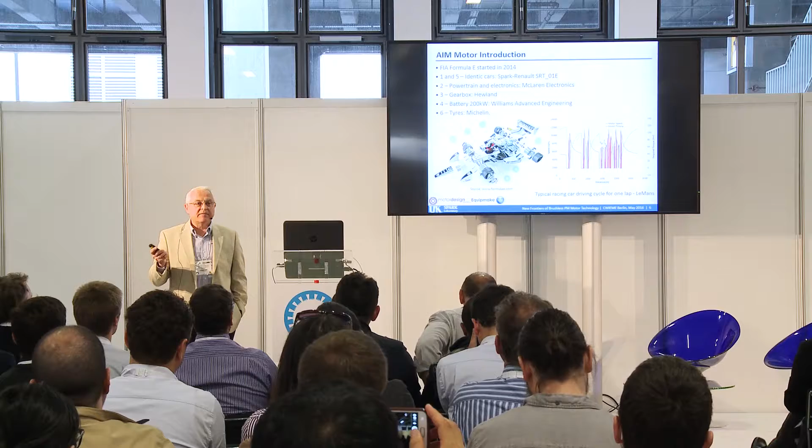Here we have a representation of torque and speed versus time. To set things in perspective and understand how we position ourselves, the motor in question is the AIM motor, listed last in the table. This is by no means a competition per se, but we just want to put things in perspective.

If you look at the types of machines employed by other electric or hybrid vehicles, they are different, and their torque per weight ratio is also largely different. We'll explain what may be the case. If we compare the AIM motor with the YASA, looking at the TRW values, we shouldn't forget that the ratings are largely different — the YASA machine has three times the torque of the AIM motor. As we know from theory and practice, electrical machines typically get naturally better as size increases. So for a small machine, only 110 Newton meters and just 9 kilograms, this is indeed record-setting.

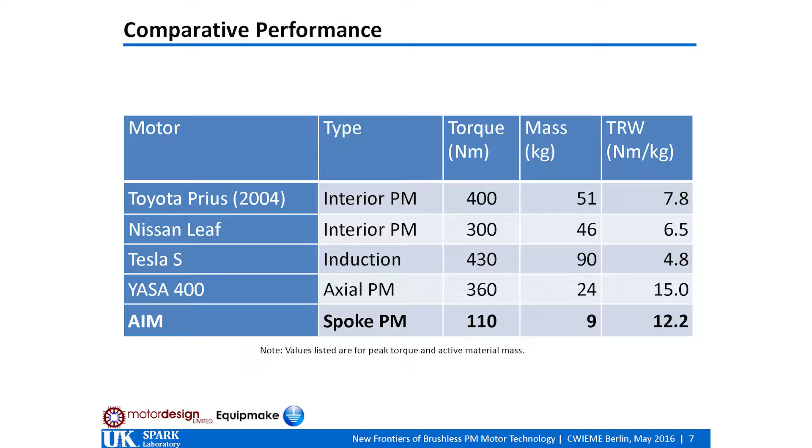I'd like to discuss how some of the teachings from Formula E, a specialty application, can be applied to more common industrial applications, since that will make an impact on the wider community. If we look at a typical pump, constant torque application, or fan curve, one would have to investigate what happens in terms of torque versus speed and efficiency, comparing various operating points within the operating range.

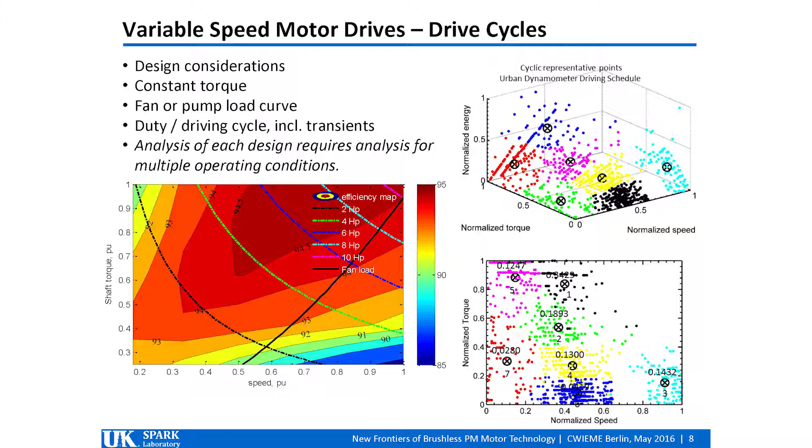If we design electrical machines for electric traction, say for an electric vehicle, the driving cycle itself is known, but nevertheless the variations from one car to another, depending on the traffic, can be largely different. So that is in a way a different challenge.

But the way to approach the problem is to do optimization. And if we look here at three parameters, normalized energy versus normalized torque and normalized speed, we select typically a number of points that would be the most important to define an objective in terms of weighted importance. Here we have figured the most important for a typical driving cycle.

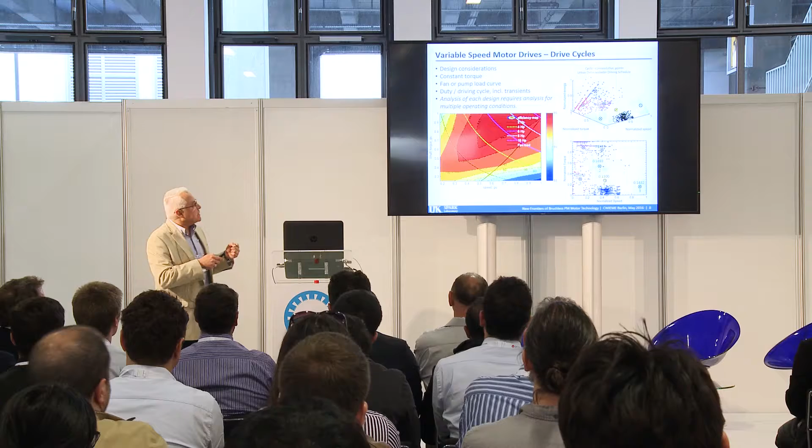Now, with modern technology, we can no longer talk about one unique optimal solution. If we optimize for multiple criteria, and the example we'll have here optimizes to reduce material cost, and at the same time to reduce the losses, the most important being the stator losses, then we end up with a family of curves.

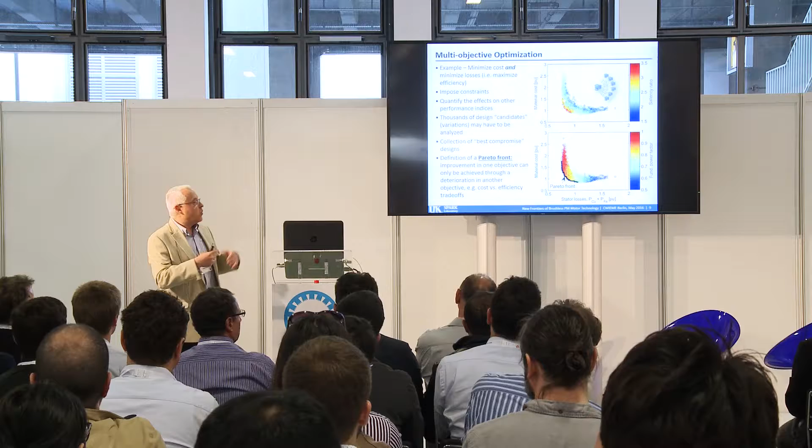What we represented with the small circles are all the candidate designs that have been investigated through systematic design procedures, and they number into the thousands. The automated design, which is inspired from computational artificial intelligence, is based on differential evolution, and will progress until it reaches what we see here demarcated as the Pareto front.

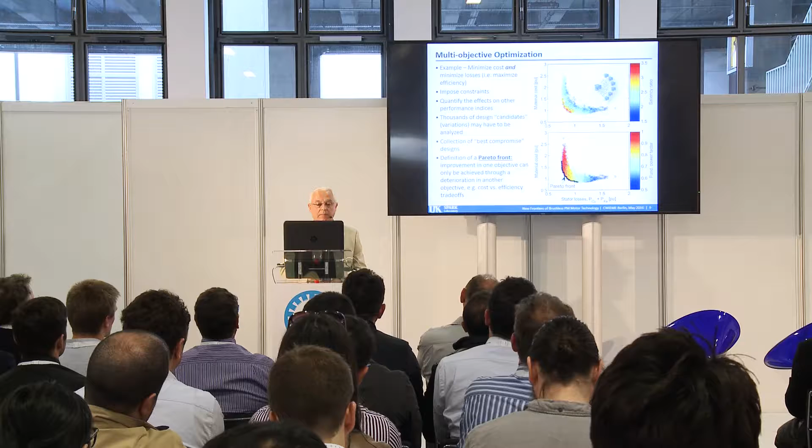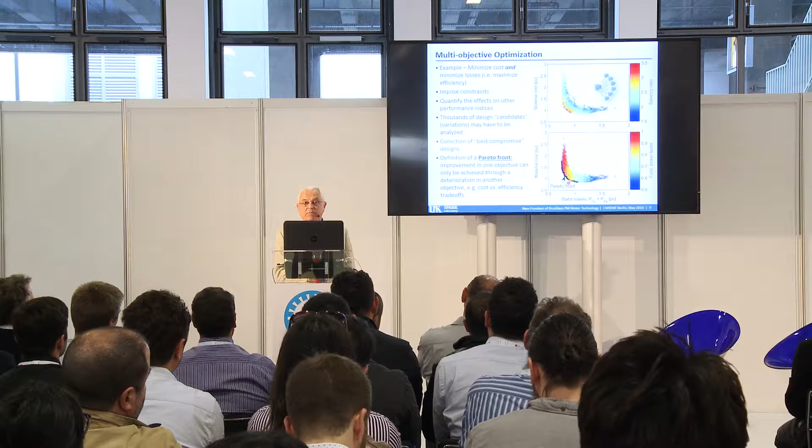And the Pareto front has, strictly speaking, a very clear mathematical definition, meaning that for any point on the Pareto front, improvement in one objective can only be achieved if we allow a deterioration in another. So here we can have machines that will have lower losses and higher cost, or we may have machines that have lower cost and higher losses.

If we do systematic studies like this, which I highly encourage the technical community to do, we may come across things that may contradict common teachings. For example, one common knowledge is if you want to have a good IPM machine, you have to have the saliency very high. Well, not necessarily.

If both cost and efficiency are important at the same time, and if material cost is actually more important, you may come to the conclusion that saliency in actual fact doesn't have to be that high.

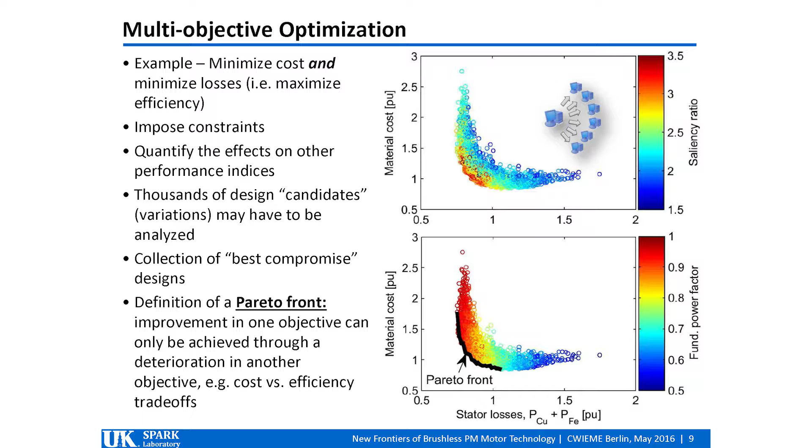Also, if one does studies like this, one is able to establish the influence on other parameters, such as, for instance, the fundamental power factor, and understand the natural limitations that may come with a certain technology.

So I'll take a moment to go outside of the Formula E racing car and use a couple of slides that come from a different application. This is an industrial example for a 10 horsepower, 1800 RPM machine.

And what we did, we undertook the task of systematically comparing synchronous reluctance technology with synchronous reluctance permanent magnet assisted, which will mean that in one case we insert magnets, in our study ferrite magnets, within some of the flux barriers existing in the synchronous reluctance. And we established a robust model with independent variables related to the cross-sectional geometry of the two machines.

And we looked at two objectives, one being to maximize the power factor and the other one to minimize badness. And those who may not be familiar with badness, think of the goodness. The goodness is defined as the Newton meter of shaft torque divided by the square root of watts of losses. This global index contains both the specific torque as well as the cooling capability of the machine.

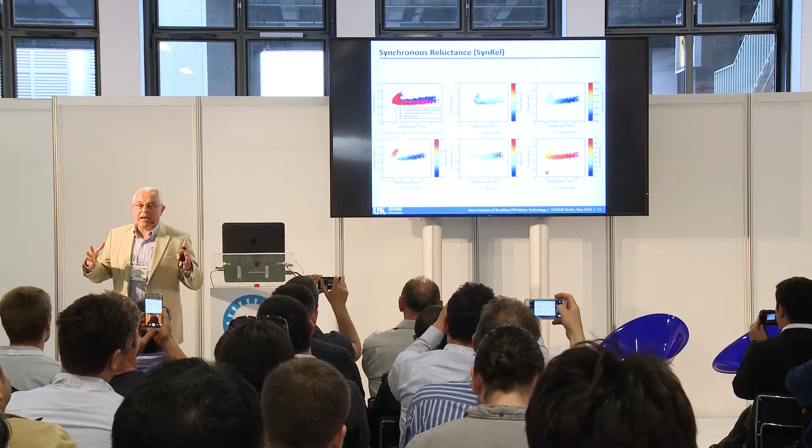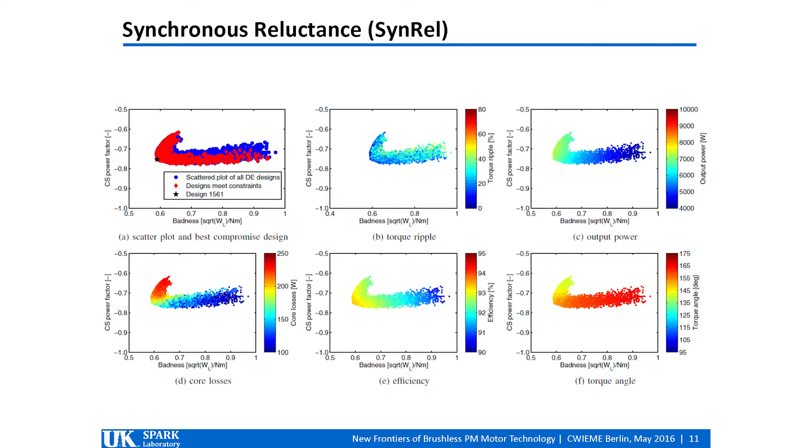If we take a closer look, this study was done using the same core length for all the machines. So as such, the output power for the machines, which is figured in this corner here, will be largely different in between the designs. Shown here are the limits for the synchronous reluctance. We go and show what happens in the permanent magnet synchronous reluctance assisted. So large differences, big increase in the power density.

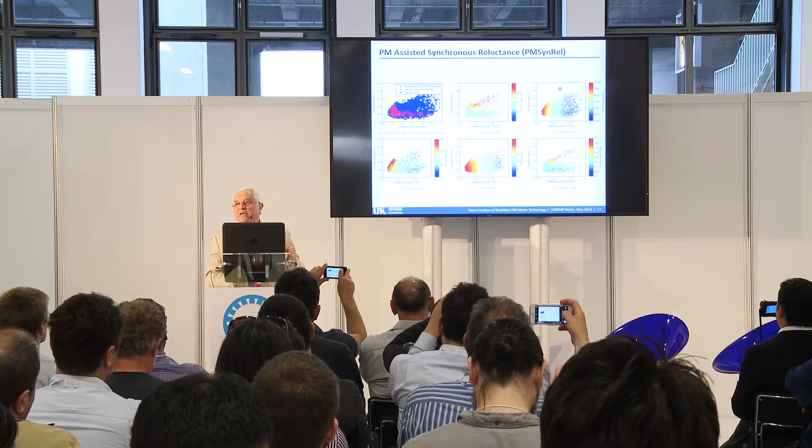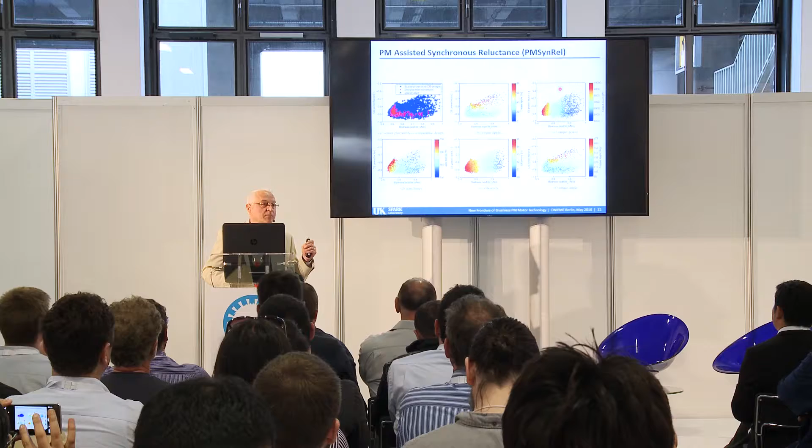But the most important takeaway is, without making a systematic study like this, it will be very difficult to pass judgment, especially if you target multiple objectives, cost and, say, technical performance on the other hand.

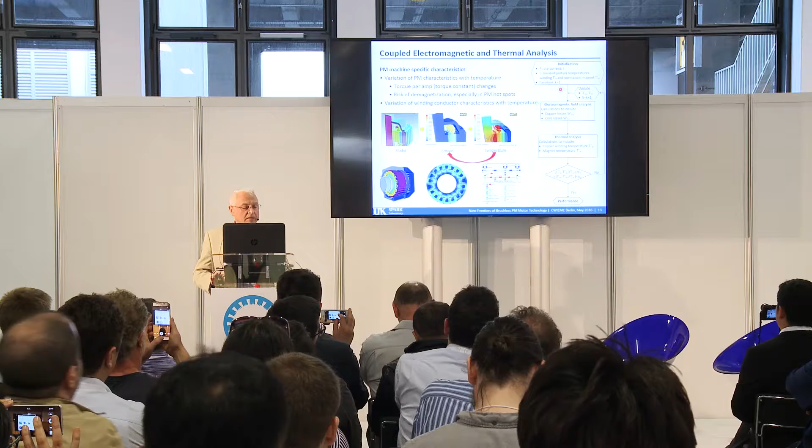To complicate the problem even further, when one deals with extremely heavily loaded, electromagnetically heavy loaded machinery, it's very important to study the coupled effects between the electromagnetic and the thermal. Just to give you an example, in a permanent magnet machine, of course, the permanent magnet characteristics themselves will vary with temperature.

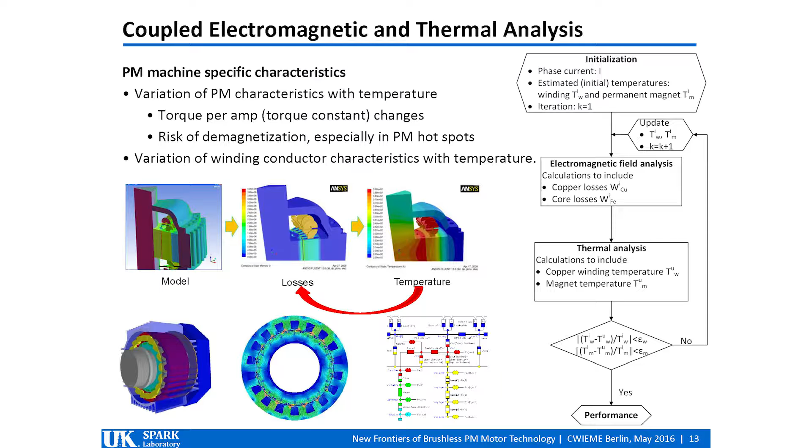This will have an influence on the torque. It may have an influence in terms of the risk of demagnetization and so on. And on top of it, we have the typical well-known dependency on the stator winding characteristics with temperature.

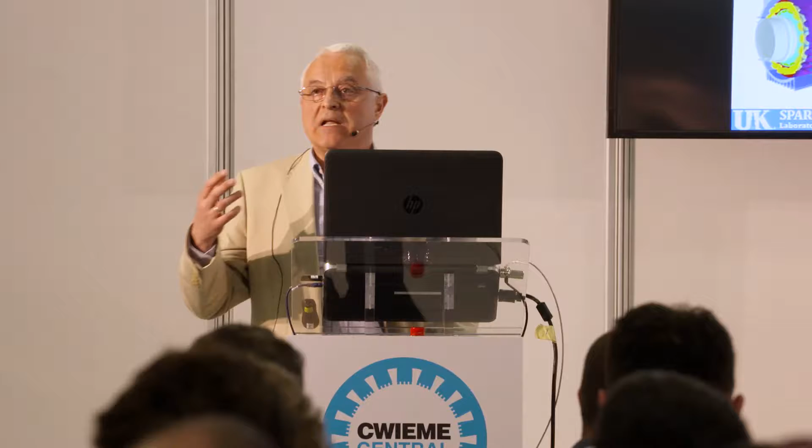So in a typical approach, one will have to do a multiple loop analysis, in which electromagnetic analysis will be performed. We'll establish losses at an assumed temperature, then go do the thermal analysis, and check to see if the temperature is as initially estimated, at least in the most important point. If it's not, we have to go back again, redo the electromagnetic, and so on, looping a few times based on experience and the goodness of the computational procedures.

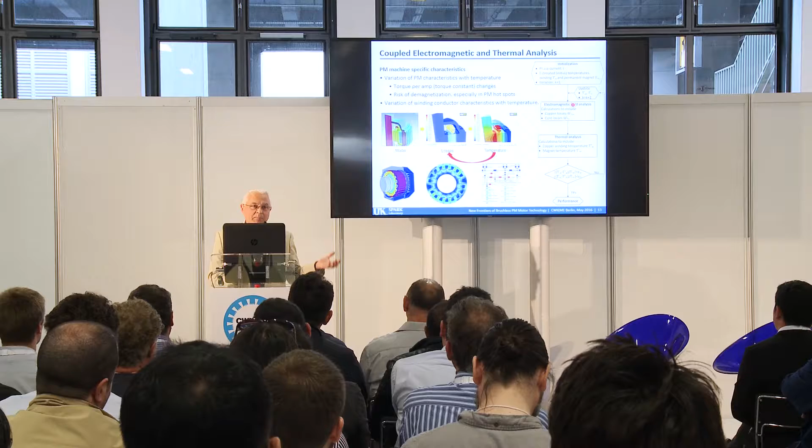So when we design, we have thousands of candidate designs on one side, and multiple operating points, as in the driving cycle. The problem becomes extremely large to start with. One way to make it all possible, and the way we employed it in this example, was to use a software that has coupled inside the same structure both the electromagnetic and the thermal.

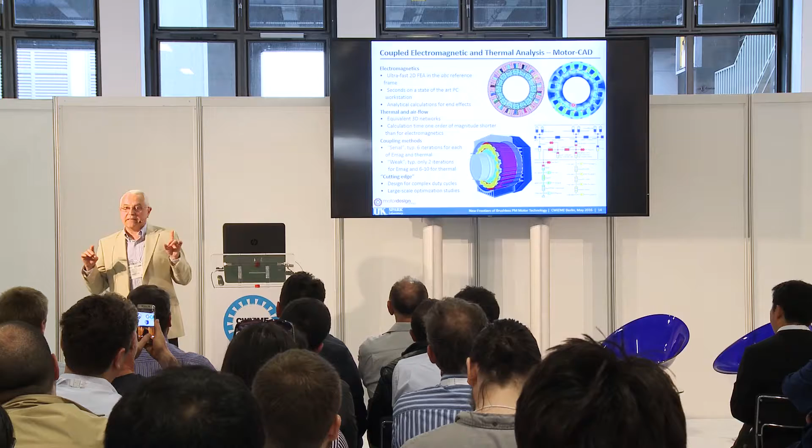This is Motor-CAD, illustrated here. Motor-CAD uses for the electromagnetic an ultra-fast FEA, and for the thermal an equivalent thermal network. We couple the two, and it provides a cutting edge, because now we can analyze complex duty cycles, and do all this in record time.

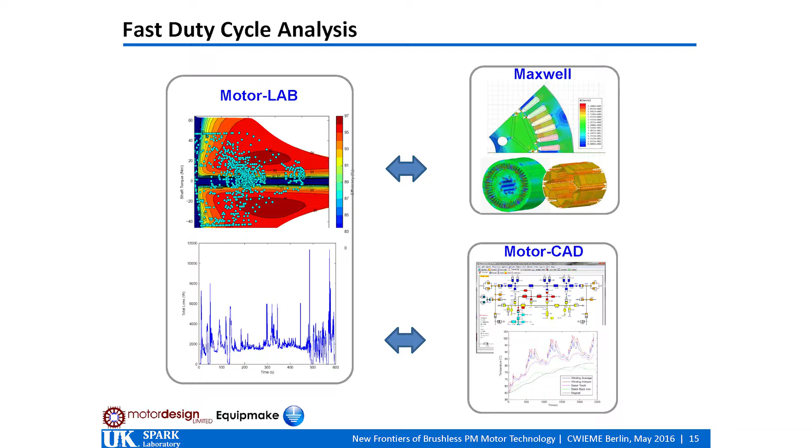The software can be coupled in different ways. We illustrated that in other papers, where we now have efficiency maps and calculations. It may go to a different type of electromagnetic software, then come and do the thermal analysis in Motor-CAD.

So going back to our Formula E example, here we have typical points on the driving cycles, the ones used at least in one iteration of the design optimization study to produce what is called a weighted loss, expressed here in per unit. You can think of this as a measure of the losses that will influence energy consumption and ultimately may affect the electricity consumption, batteries, and so on.

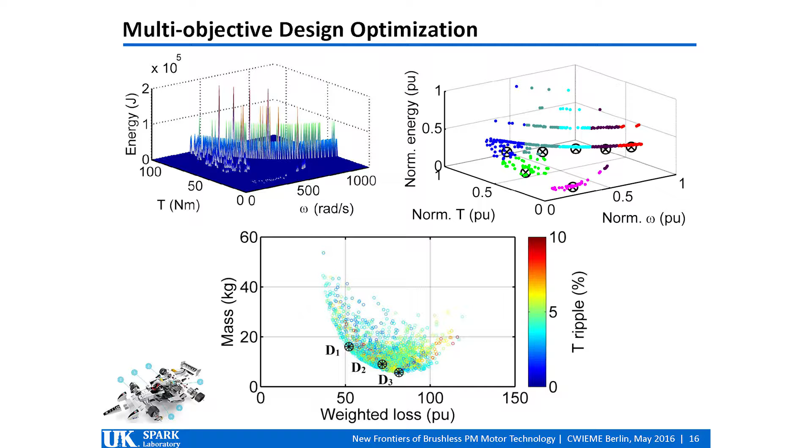On the other axis, we have the active mass of the motor. As you can see, we have a big cloud here full of candidate designs, and then we can establish a Pareto. The problem is very complex, because we have to consider the system influences, other things going behind the scenes, and the thermal.

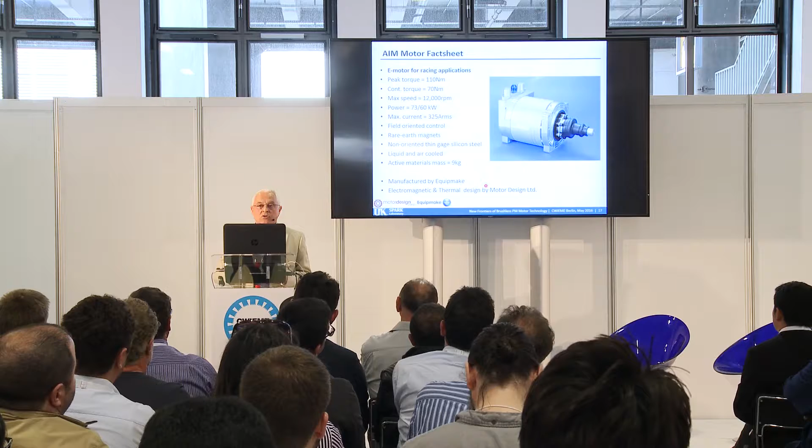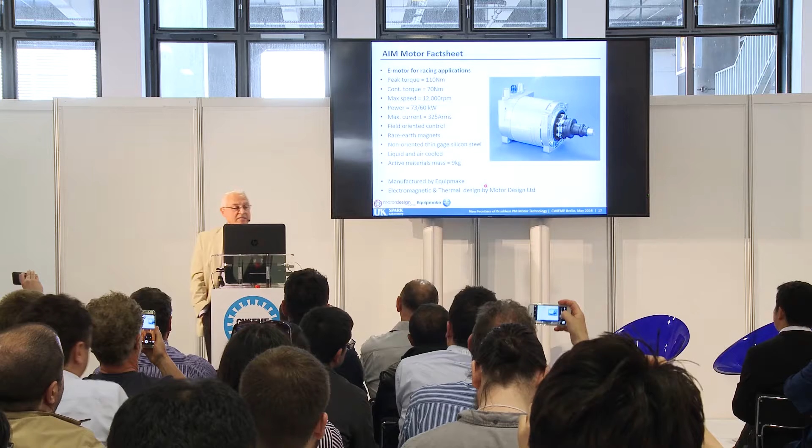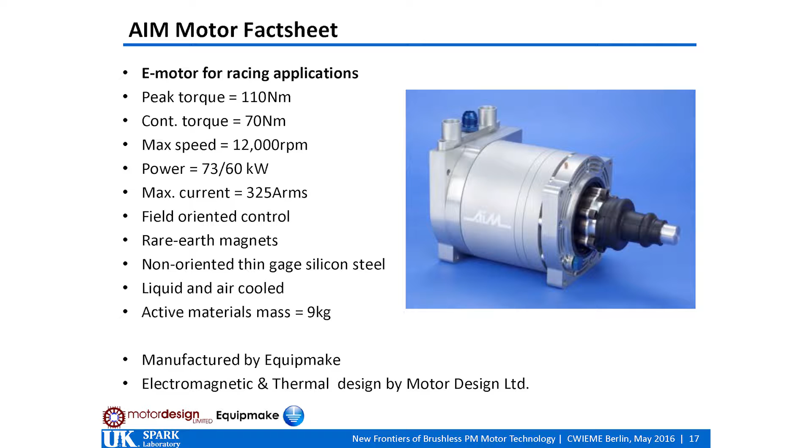To summarize the main results on the machine that has been physically demonstrated, we have listed the peak torque, continuous torque, maximum speed, power, and the type of magnetic materials used in the construction at a high level. To bring acknowledgement, the manufacturer of the motor is Equipmake, and the electromagnetic and thermal design was done by Motor Design Limited, and we contributed the optimization.

Speaking of the optimization, we'll have a technical paper coming at the ECCE conference later this year, so that will be more in-depth coverage of the subject matter.

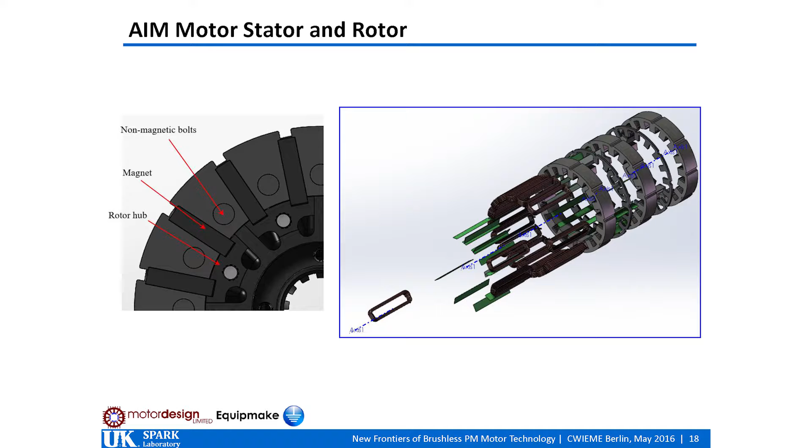As we go along and show some of the results, you will be able to see the magnitude of the magnetic loading. The Stator is a concentrated winding. This is an 18-slot, 16-pole combination, with all the advantages that carries in terms of high winding harmonic factor and so forth. The windings are, of course, modular and concentrated. Cooling is ensured through a combination of air and liquid.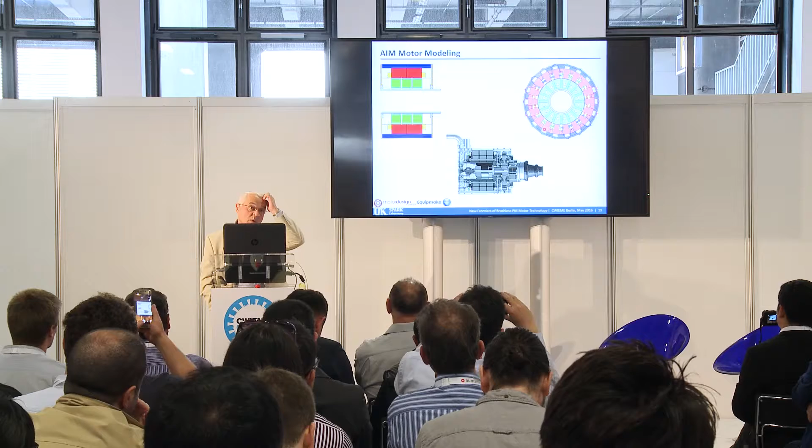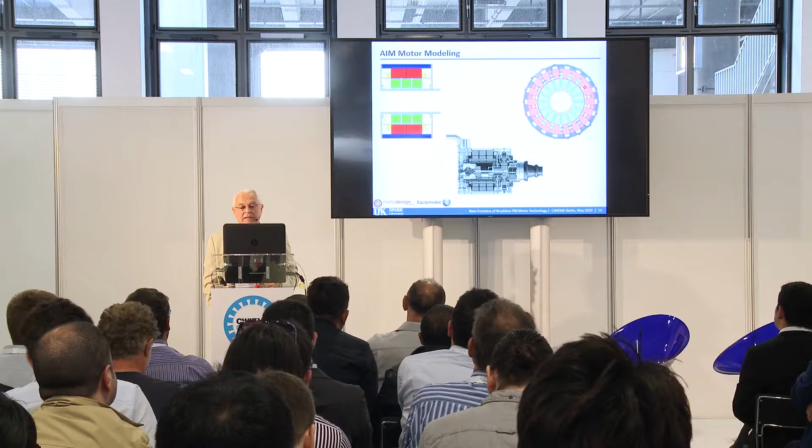We also have axial sections shown into the motor, and here we have also shown the typical winding configuration. The phases are grouped, red, yellow, blue, in groups of 3.

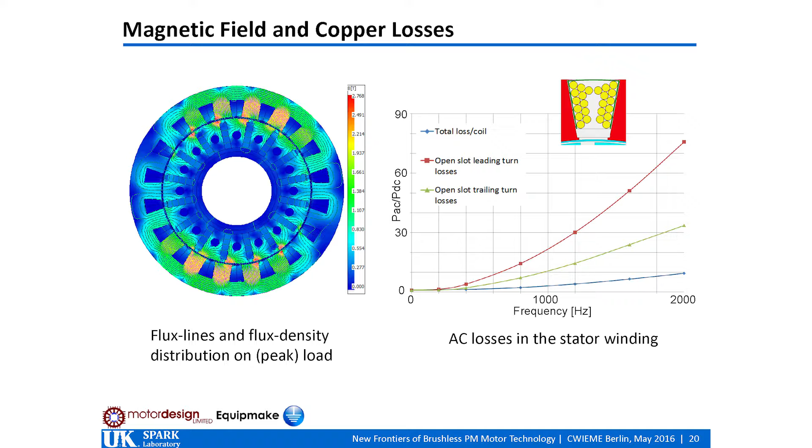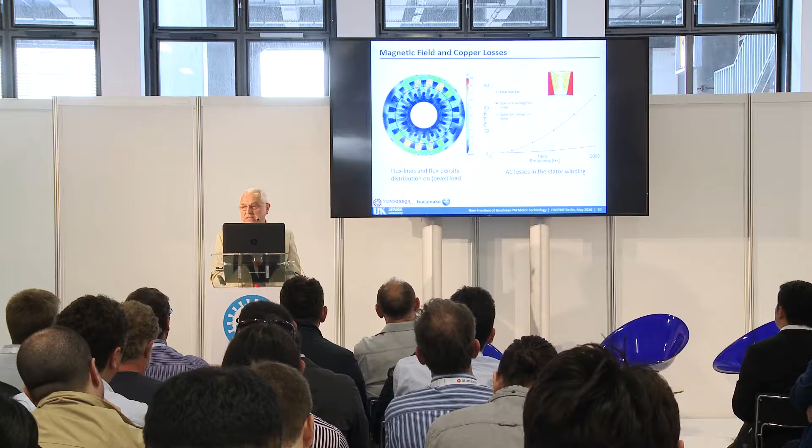So take a look at the magnetic field and copper losses. Here we have a representation to scale of the magnetic flux density, with extremely high values. Keep in mind, whenever we talk about this, the driving cycle is known, so if you have the tools in place to handle such high electromagnetic loads, this is the way to go. The other takeaway would be the ratio between the AC losses and DC losses in the winding. That's very important to monitor and optimize through the design, and different combinations and solutions should be considered.

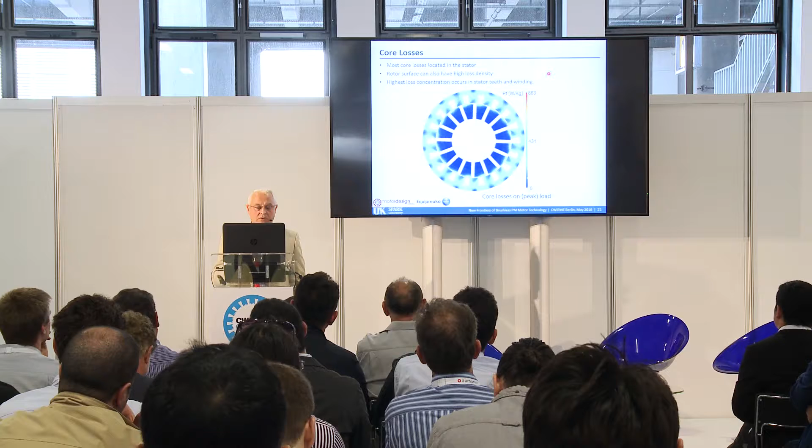Core losses - yes, this is a highly loaded machine. Here we have a representation on the color scheme. We talk about substantial losses per kilogram.

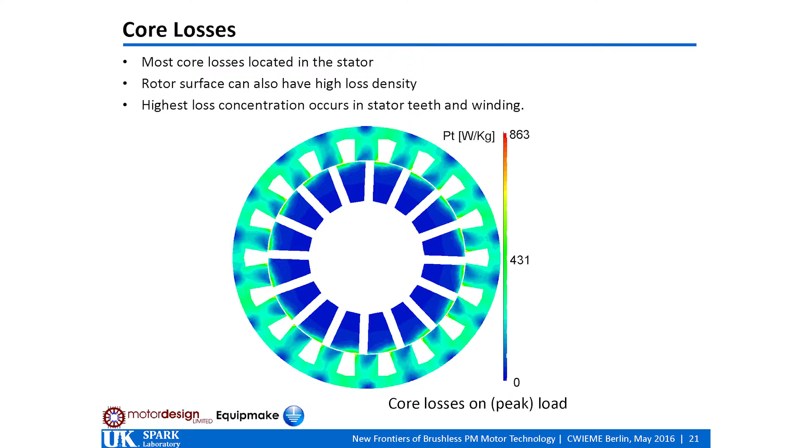I'll show later on what happens with the temperature as the car goes through the driving cycle.

In an IPM, losses in the magnets will be substantially lower than in an SPM. But here we talk about a machine which has high harmonic content in the MMF, permeance variations, and high frequency.

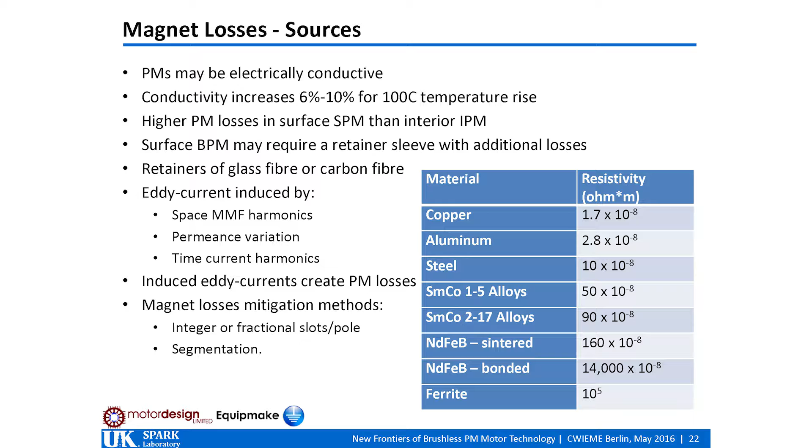So even the losses in the magnets can be of concern. We look at the options, and concentrated on high energy magnets in order to have high power density. Samarium cobalt holds an advantage in temperature resilience, and neodymium holds an advantage, at least at room temperature, in resistivity as well as energy density.

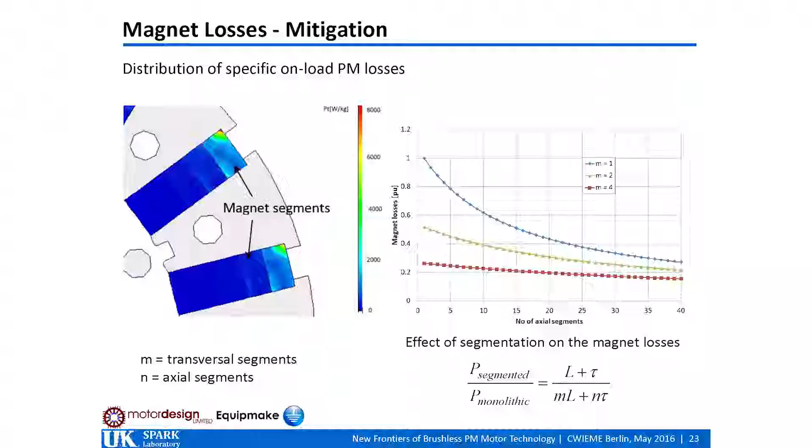A common technique to minimize the losses in the magnets, which can be substantial, is to segment the magnets, even in an IPM construction. You have different options to try combinations of both axial and cross-sectional segmentation, and one would do a parametric study to see which is the optimal number of segments to employ.

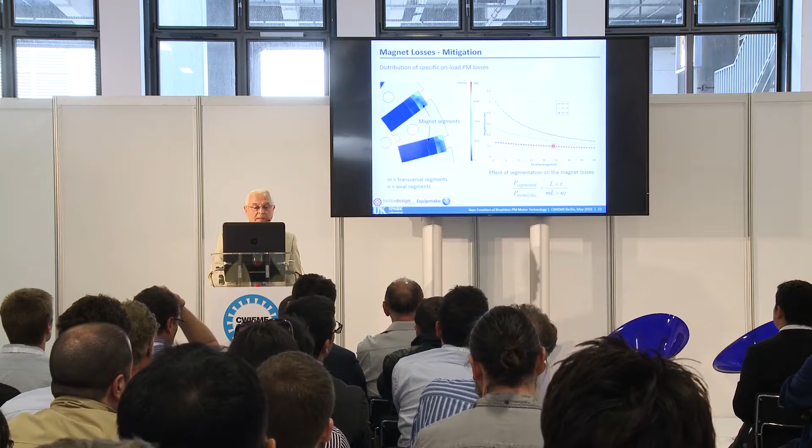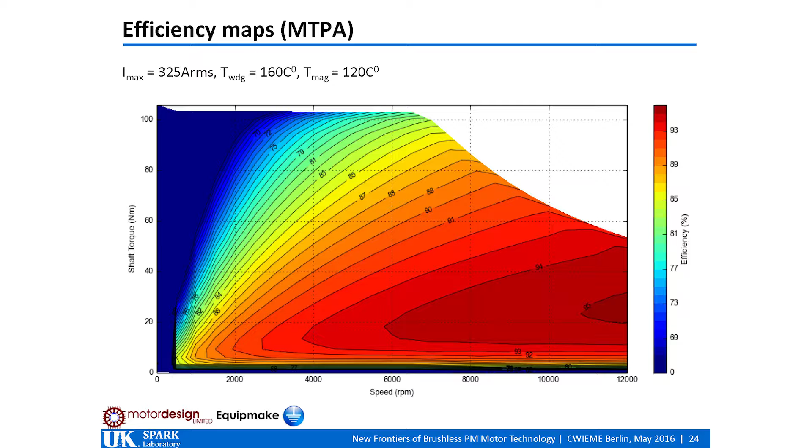Once a design is completed, at least for machines expected to operate at what we label the steady state, efficiency maps will be drawn. This is a thorough investigation of the torque versus speed space, where we look at the efficiency values. But for this particular application, even more important is the duty cycle.

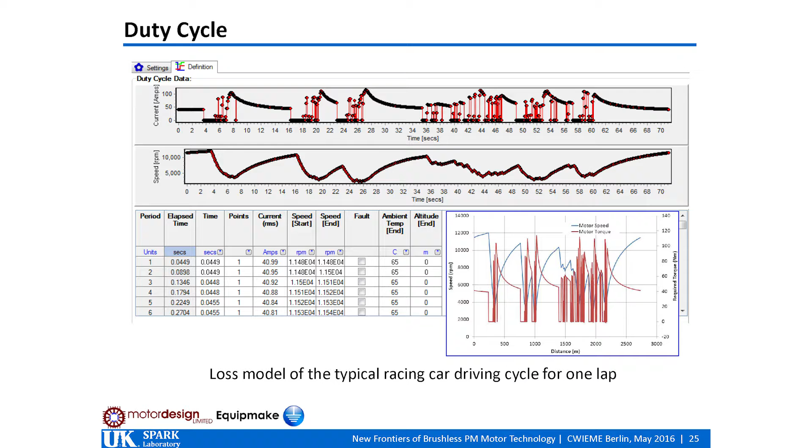Each lap has a drive cycle, and it takes quite a few laps for the machine to get to its rated temperature. By that time you may need to stop for various reasons, then restart, and so on. So the transient analysis becomes extremely important.

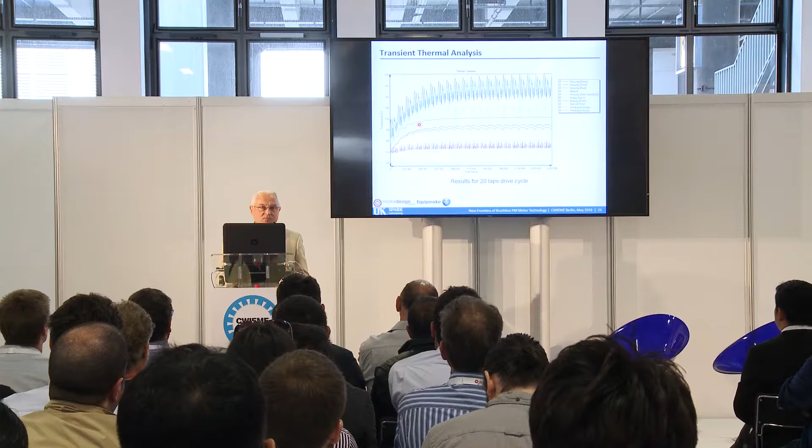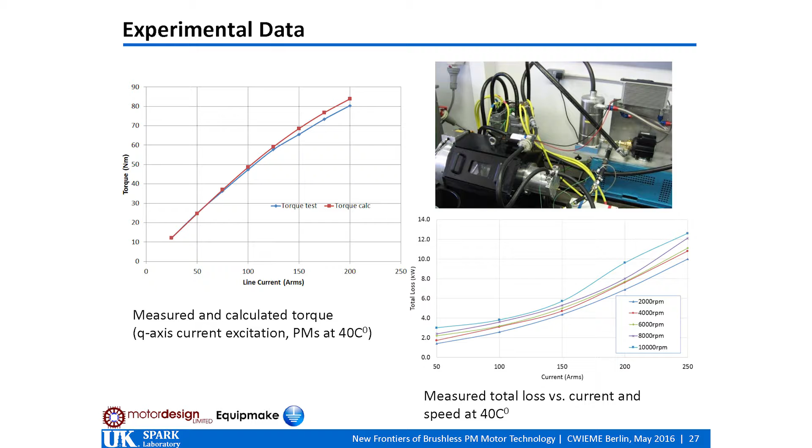If we look at the experimental data, this is part of the demonstration. It shows fairly good response of the torque versus line current. A very important takeaway is the precision of the estimation compared with the measurement. We also have measurements of the losses versus current, again with satisfactory precision.

This brings to conclusion the first part of the presentation. The second part gives me an opportunity to talk about emerging materials, and out of the many that may be out there, we'll focus on carbon nanotubes, also abbreviated as CNT.

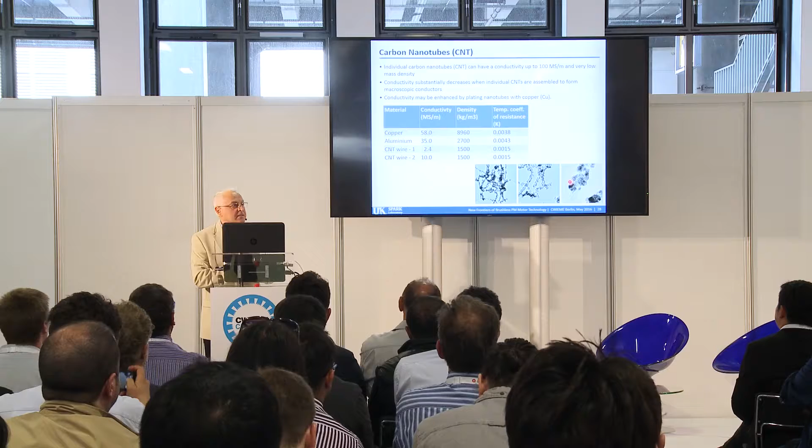Such materials have made the news in the last couple of years, and one reason is because they hold a big promise of extremely high conductivity. The carbon nanotubes themselves, before being assembled systematically in a wire, can have conductivity up to 100 megasiemens per meter, which compared with copper is almost twice as high.

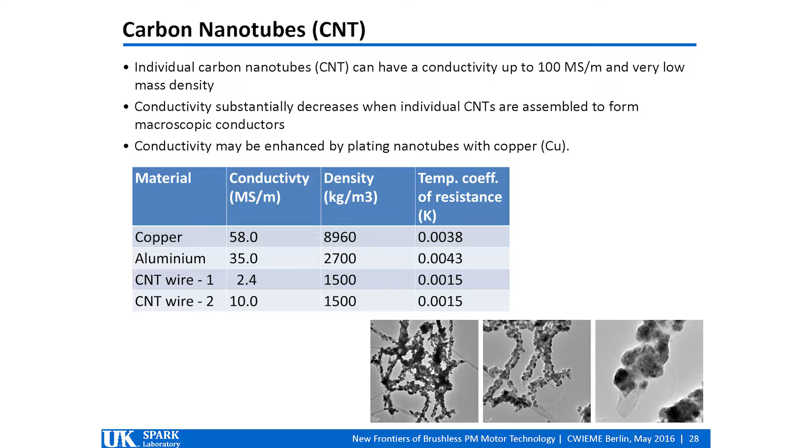The challenge is to make it at that kind of conductivity, because by the time we assemble them in wire, we can maybe produce something in the range of 2.4, orders of magnitude lower, and even for some of the most successful reported, it may be only at 10. So conductivity for a physically realized wire may be as low as 6 times lower than copper.

But nevertheless, the density itself is also 6 times lower. So there opens up opportunities, even with the materials as they are today, for some improvements.

Another important takeaway is that the temperature coefficient of resistance for carbon is substantially lower than it is for copper. So if the machine were to operate at high temperature, and if additionally we found means of improved heat transfer, doing synergetic design of machine together with materials, the opportunity longer term, futuristic, may be out there.

Now, our group works on an approach to enhance the conductivity by using plated copper into the wire. At University of Kentucky, in the Fiber Development Laboratory at the Center for Applied Energy Research, we have the largest spinning facility existing in US academia.

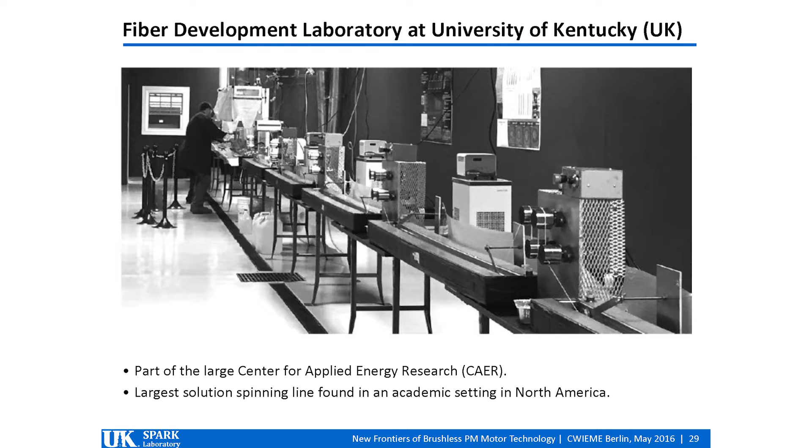Simplistically explained, at one point you put in the carbon particles, and then you draw the wire or the fiber as it is. It is a complex process, and here we only get a glimpse of it.

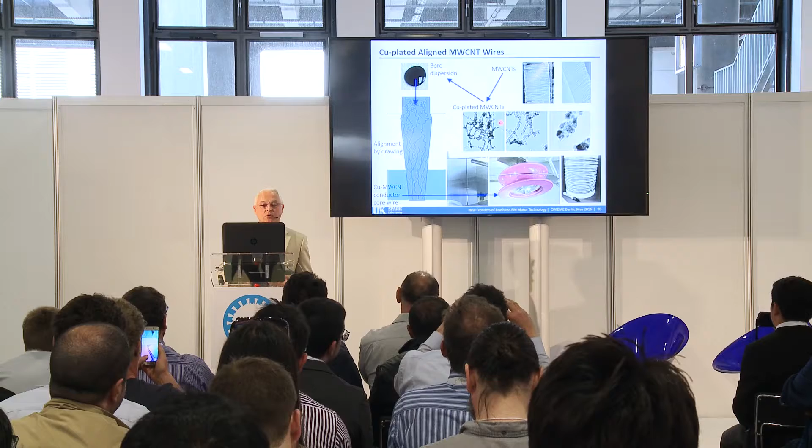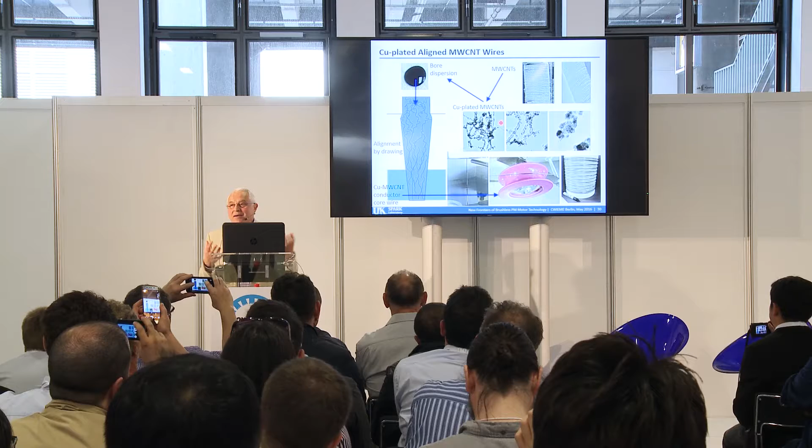Copper plating to produce the wire introduces a further challenge. My material scientist colleagues have put together one schematic slide trying to compress as much information as possible. One takeaway is that at some point you need not only to plate with the copper, but also make sure the copper is aligned in the right direction of the wire.

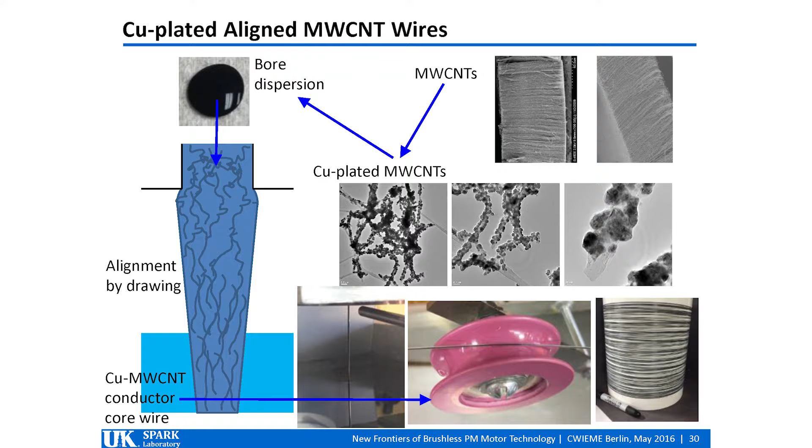Yes, the direction in which the current flows. So these are some of the manufacturing challenges at the research side.

Now, from the electric machine world, we come at the problem and try to establish at least a realistic benchmark. If we would take the wire and make a drop-in replacement, I don't think that would be the best way to illustrate the technology, which is in its early days.

So we focused our attention on a machine where copper losses are extremely important—in actual fact, they dominate the losses. And we ended up with a coreless topology, which opens further opportunities for improving the heat transfer and the construction between the nanocarbon tube windings and a simple supporting structure in the stator.

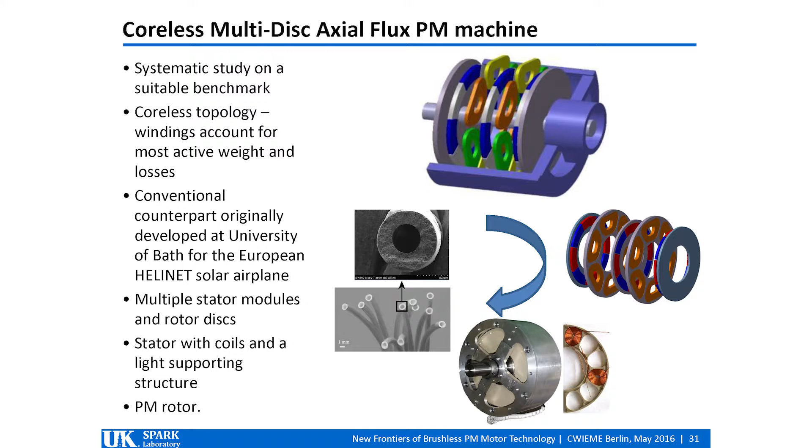So let's have a look at this construction. Before we do that, I should mention this is actually inspired from work done years ago by my previous academic group at University of Bath, led by Professor Eastham, and they built the high altitude solar aircraft, as it was, Helinet.

They built the electric machines that power those aircraft. What we see in the lower part of the slide is a representation of that old machine—beautifully made, titanium frame, with multiple discs of permanent magnet and windings.

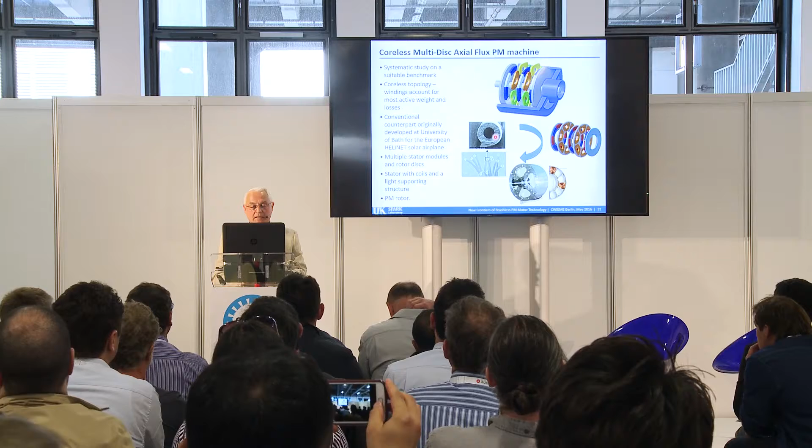The plan, and the design studies we did, would be to take the nanocarbon wires, then assemble them into coils. The coils get fixed into the stator. With a multi-disc structure, we have the ability to increase or decrease the number of discs depending on the rating, in order to make a feasible comparison.

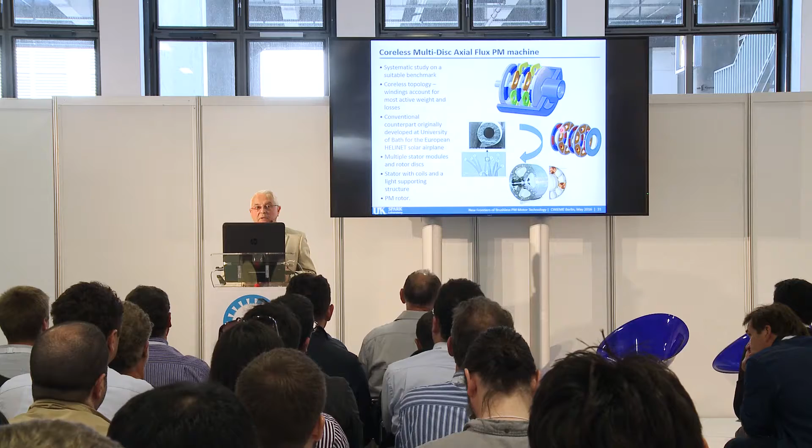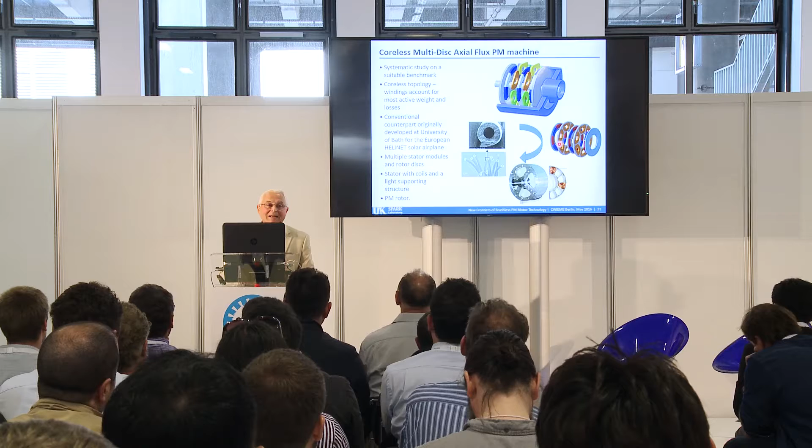And then we will combine this with a rotor with permanent magnets, at least in one configuration. The last of the rotors would use a Halbach array, so there may not be even a need to have any kind of steel in the rotor altogether.

Out of the many design studies we have done, one is exemplified here, and we look at what happens as the speed increases, in terms of performance—power density, watts per kilogram. You have to keep in mind the original machine was a so-called low-speed machine, somewhere in the range of 1500 RPM.

At that kind of speed, in actual fact, the machines, in terms of watts per kilogram, will be comparable. As the speed increases, if we consider the so-called CNT wire 2—going back a few slides, this is the best case scenario, the one with 10 mega Siemens per meter conductivity—we may find that particular one has increased the power density twice as much as copper.

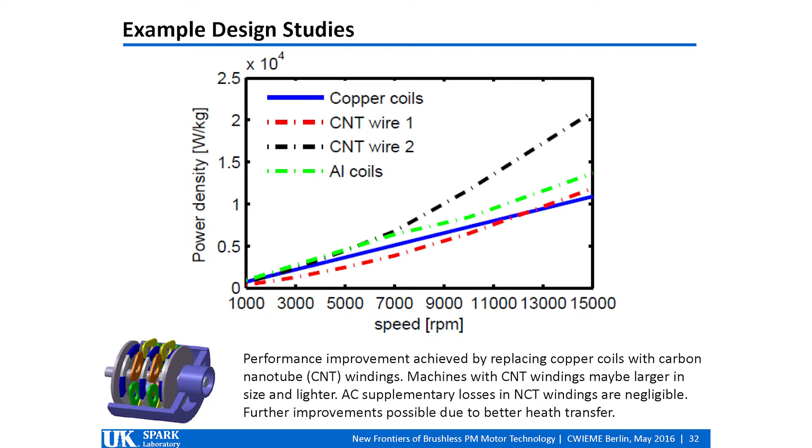The other takeaway is that for those kinds of machines, even aluminum may make an improvement above copper. There are reasons for that. One could be related to AC losses, the supplementary losses in a machine like this, which would be significant and require the use of Litz wire and the like.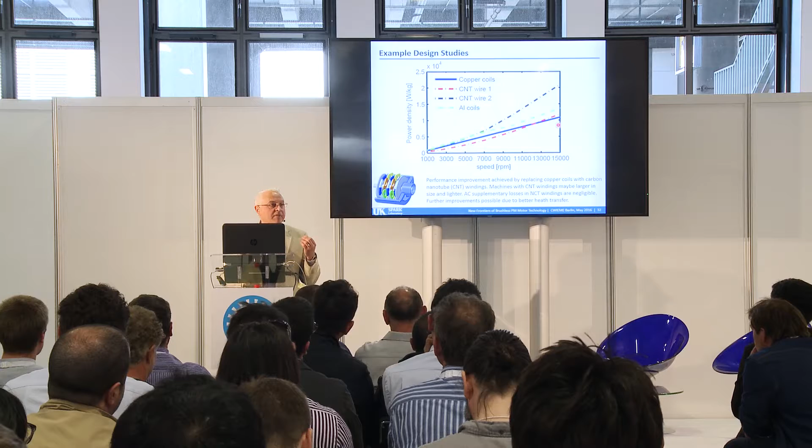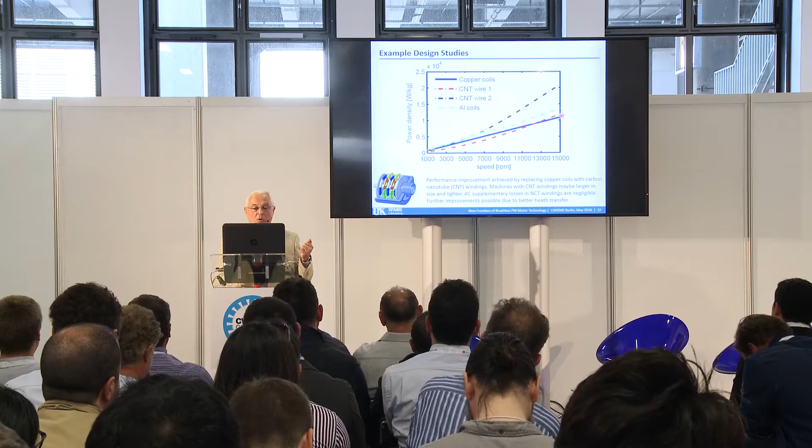In the nanocarbon tube construction, those losses are expected to be very small. By the very nature of the nano, the extremely small wire, plus the nature of the carbon, those are expected to be low and make an impact on performance.

The US Department of Energy takes great interest in carbon nanowires. They took a very radical approach because they looked at what happens in terms of the population of electric machines out there. If you were to plot the percentage distribution of losses versus the motor rated power, and you do it for low ratings, say 1 horsepower, 2 horsepower...

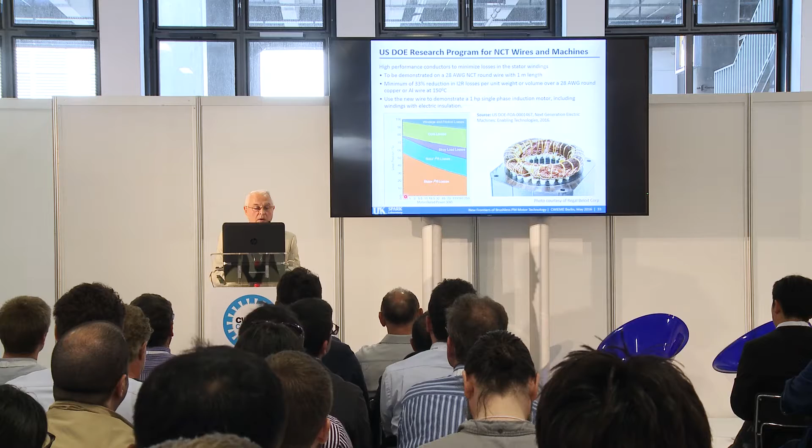you'll see that the stator losses really dominate. So anything that can be done with this huge population of induction motors, even in the most common applications, would be beneficial.

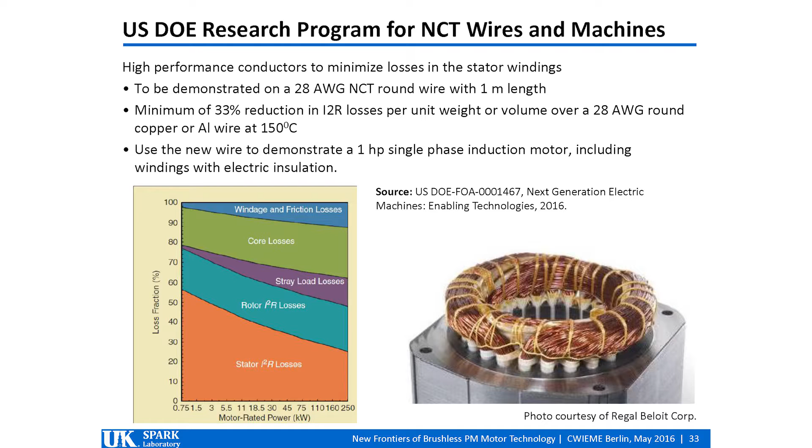So they set very ambitious targets. The ambitious target would be first to produce a 28 American wire gauge—this is American wire gauge, a very fine wire, by the way.

It will be substantially smaller than we will use in the 1 horsepower machine, as the demonstrator required in the second part of the project. But nevertheless, it would be significantly large in terms of the nano. So the first task would be to produce and demonstrate this 28 American wire gauge consistently, at least on a 1 meter length, and then achieve at least a 33% reduction in the stator wire losses, in the I squared R losses.

And you have to do that either per unit of weight or per unit of volume. And the comparison has to be done at 150 degrees Celsius, which works in the advantage of the nano to a certain extent. But you have to think of the challenges as well. Once all this is completed, it has to be demonstrated.

The most challenging machine, those of us used with electric machinery would admit, I would think, is the single-phase fractional and small horsepower machine, because that has been studied for a long time. It went through many design iterations.

On top of it, on an induction machine, there are very intricate influences between the magnetic field and the electric. So permeability is also very important. Copper losses are important from various aspects and so on.

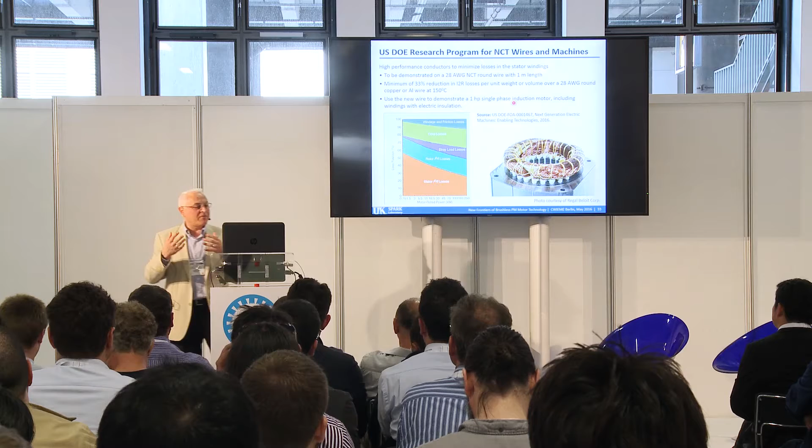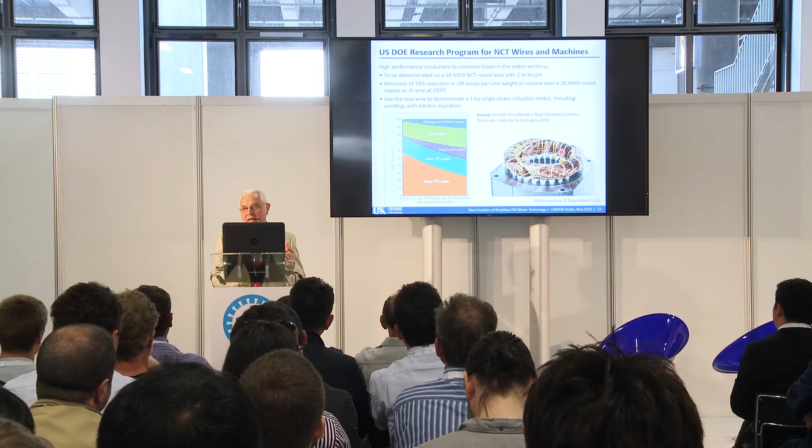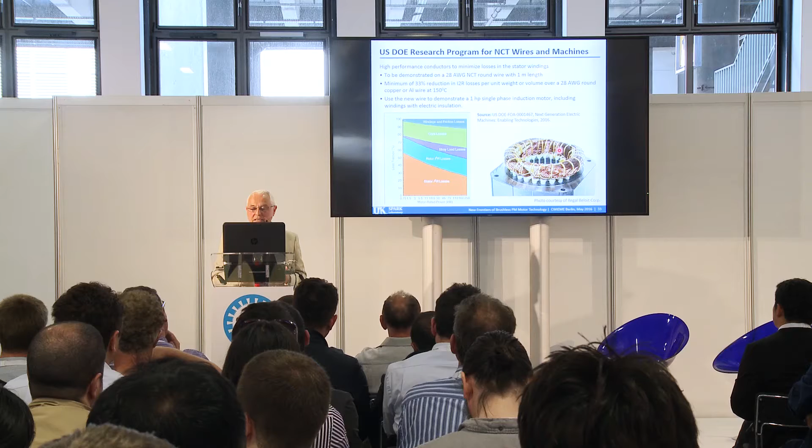And then in order to make the demonstrator, one would have to assemble everything in a realistic prototype. That will mean we'll have to solve all the problems in making an electric insulation for the wire, make it compatible with the insulation systems, and then assemble everything together.

So in conclusion, things that we can do today - a good example coming from Formula E for the more common application is that innovation with existing materials, things that really happen on a daily basis, can still be done.

Great benefits can be achieved by employing automated design optimization, and very importantly, especially for machines that use duty cycles or operate at high electromagnetic loadings, the ability to do analysis that couples electromagnetic and thermal becomes important. If we keep in mind that studies with differential evolution will take thousands of candidate designs, the ability to do such analysis quickly and with satisfactory accuracy is of great importance.

On a more distant future, lessons learned from nanocarbon technology may bring improvements from the materials, no doubt about it. But as we know from the conventional industry, it may take time to deploy such technologies. So personally, I would expect the first impact and benefits we will see is really in high-tech applications where weight is extremely important and cost maybe not so much. Even those who would be able to deal with an increased physical size but reduced weight, those would be maybe primary applications.

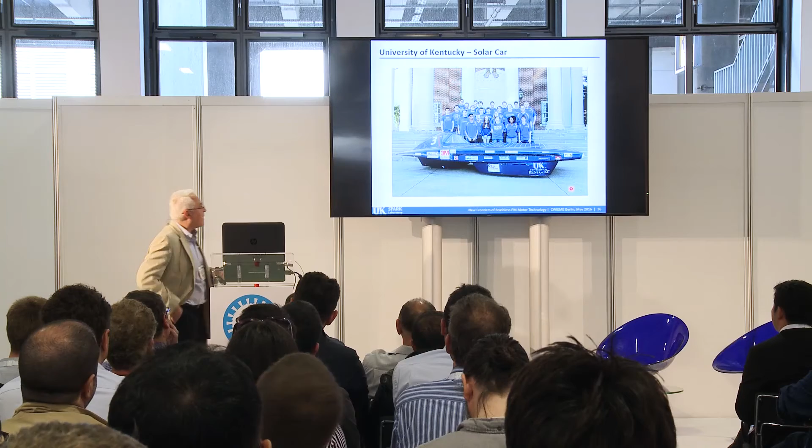But there are also the solar cars, and those who are interested, we have a team at University of Kentucky. This is a big competition, at least in the US and also in Australia. I'm not so familiar if it has any European counterpart. This is a team only with students, so the students put together a car, and this is the one we have from Kentucky.

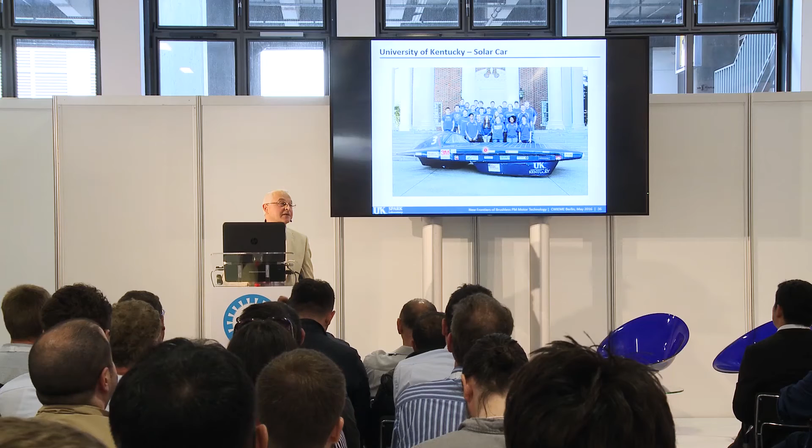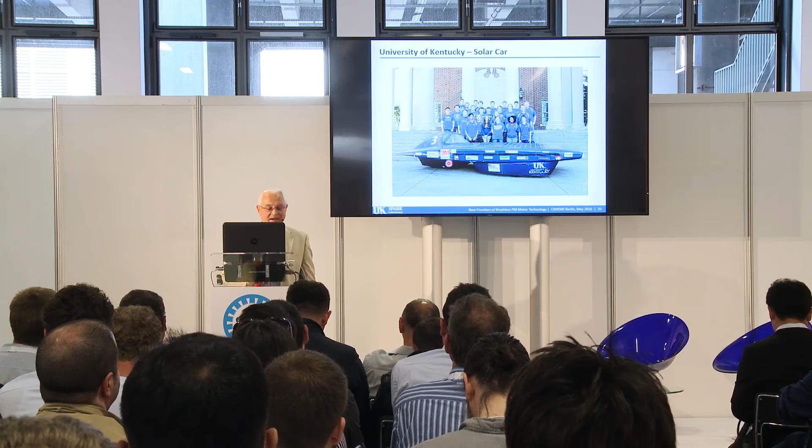It's also only powered by the photovoltaic installed on the car. What makes it interesting from the electric machinery point of view is that this type of car is typically powered by axial flux machines, which are mounted inside the wheel itself. So if we get to do the carbon nanotube axial flux, this may be one application in our courtyard.

As a final remark, I would like to mention there is a need, on one hand, to have better methods to design electrical machines, and on the other hand, to bring up the new generations of engineers and train them. So what happened is two universities, University of Kentucky and Marquette University, together with one partner, Motor Design inspired by the legacy of the SPEED consortium, which many of you would be familiar with, have established recently a consortium. And we have 4 inaugural members.